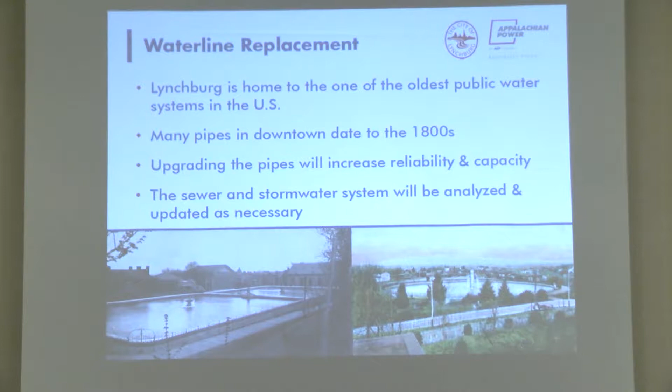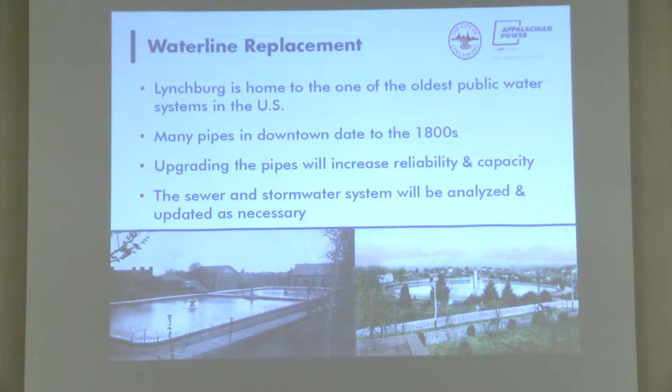You may recall it all started with the water system. Earlier this decade, we were having a lot of breaks and problems with the water system. Before this program began, the average age of a water line in downtown Lynchburg was well over 100 years, and we quickly realized it was reaching the end of its useful life. We embarked on a program to replace 49 linear blocks of water main in downtown Lynchburg. It all needs to be replaced—it's all old, and it is all reaching the end of its useful life.

3 years ago, we started on the first phase of this project, an 8-block area on Church Street and Main Street, and 7th and 8th. We took about 17 to 18 months to perform that work, and from our perspective—and I hope from yours—it was a very successful project.

We finished on time and well under budget. I was thrilled to be able to return $1 million to the city that we didn't spend but thought we might need. Overall, I am very pleased with how it ended up, and I think the city, and we hope you the community, is pleased with how that worked.

As we reached the end of that, Bonnie mentioned we had planned to go to Commerce Street next, making 5 blocks in that area our next project. But we were a little ways into designing that when Appalachian Power approached us and let us know that they too needed to replace critical infrastructure downtown, and unfortunately the area where they needed to do that was not the area where we were planning our next project.

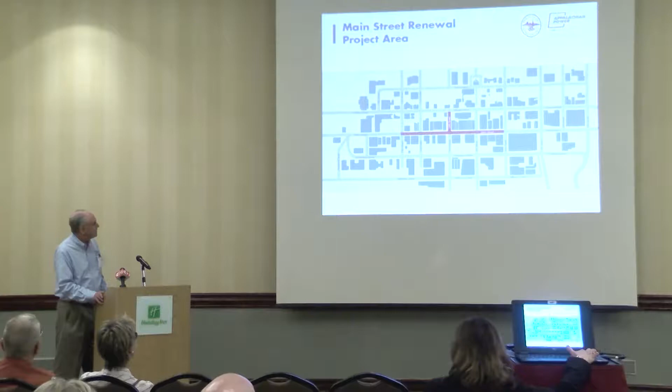This is the area shown in red in the center of the map: 4 blocks on Main Street, and 1 block on 10th Street between Main and Church. The 4 blocks on Main are between 8th and 12th. That is where this phase of the project will be. Eventually we will get to all those other phases, and eventually we will go back to Commerce Street like we had planned to do next.

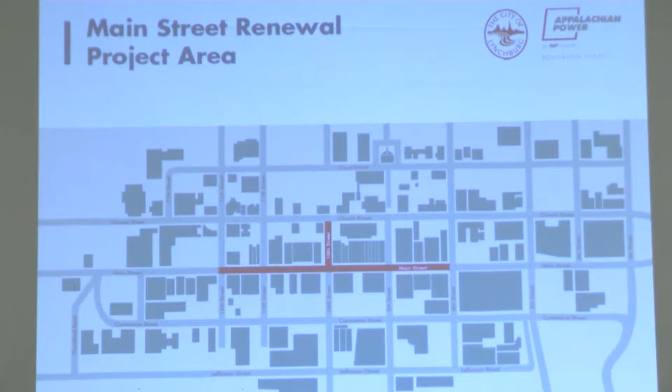But for now, we're working with AEP on this. We have been working very closely with them. Ever since they first told us this needed to be done, we started scheduling regular meetings, with conference calls and consistent meetings.

We had a lot to learn about each other's cultures, priorities, and how we tend to do work. There were some learning experiences there, but it was very valuable. Now I hope they would agree that we have a really good, really strong relationship. We hope to make this appear to be one project to y'all.

In reality, contractually, it's actually 2 totally separate projects. We have our own engineers, they have their engineers. We have our contractors, they have their contractors. We have our managers, they have their managers, they have their budget, we have our budget. But we really want to make it all work together as one project, and I think we're on a really good path to make that happen. The level of cooperation is really strong.

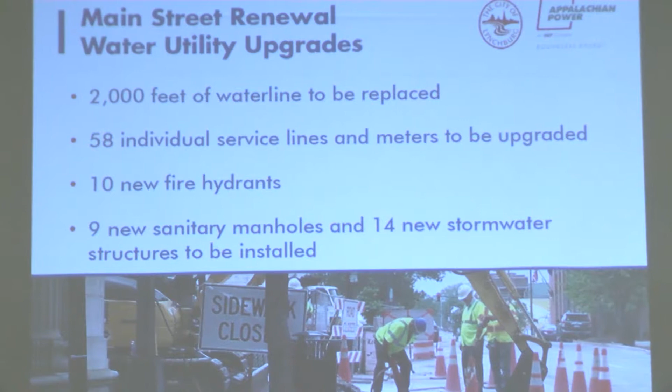So what are we actually going to do? Speaking from the city's perspective, we are going to replace virtually everything you see between the building faces on Main Street between 8th and 12th. All the curb, all the sidewalk, all the streets, all the gutters, 2,000 feet of pipeline, and the individual services to every business and resident in that area will be changing. Just everything in that area is going to change.

Once we get above ground, we typically, when we do a project, like I said it started with the water system, but we never like to do just one thing. Bonnie spoke to that too, that we don't want to go in and just do the water system and then 5 or more years later have to do something else. We want to do it all at once. This has been the policy of the city for many years. We did that with our CSO program, that when we replaced sewer lines in a neighborhood, we did the water lines, the streets, and the sidewalks, so that we only have to do it once.

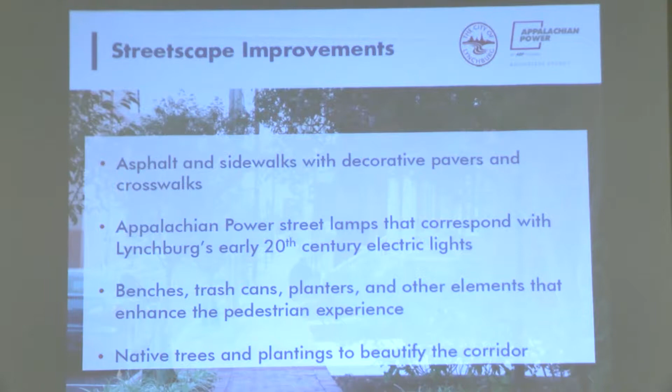This time we have the added advantage of also doing the electrical system, which is not ours and usually not under our control. But everything you see will be replaced: streets, sidewalks, curbs, gutters, light poles, benches, trash cans, planters, trees. Everything will change, and hopefully for the better. There will be some tough times going through it, but I think that's all I have to say. Oh no, I do have more to say.

The most important thing—a lot of what I just talked about was possibly old news if you had been following us—but here we have some really specific information we are basically announcing tonight: when we are going to start. That is September 16th of this year, so a little over 4 months from now, we'll be getting started.

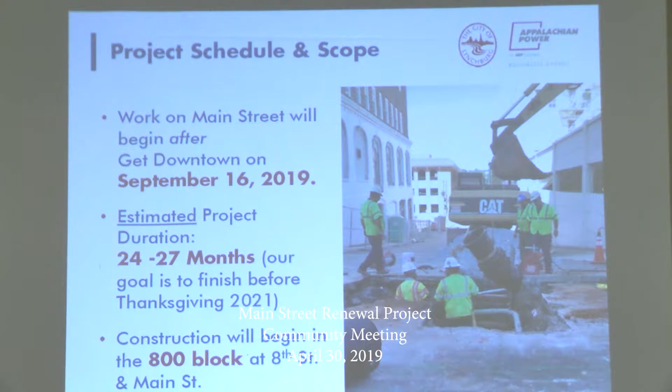We're estimating that it's going to take us between 24 and 27 months to do this project, with a goal of finishing by Thanksgiving of 2021. We will be starting at the 8th Street end of the project and working towards 12th Street, but we will very quickly be encompassing all blocks.

I want to talk a little bit about how we're going to manage things within a block. We won't go into detail tonight, but I do want to mention that in each block there are 3 corridors: a street for driving, and 2 sidewalks. So of those 3 corridors, we've set a goal to never close more than one at a time. That's something we did not do on phase 1 — we frequently had more disruption than that, but that's part of our goal now.

We don't know the exact sequence of anything, or how we're going to jump around, but we will have more of that information available at our later meeting in August.

And this time I think I'm done, right? So is Tom Woodford here? Tom Woodford with Appalachian Power will talk about his role.

Well, I'm Tom Woodford with Appalachian Power Company, and what I plan to do tonight is a brief overview of the project from Appalachian Power's perspective, of what we plan to do and when we're doing it.

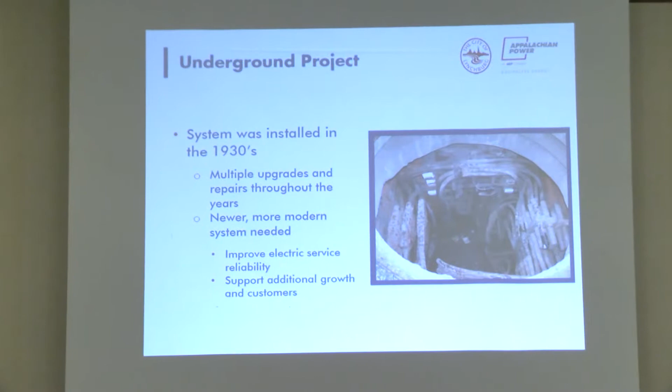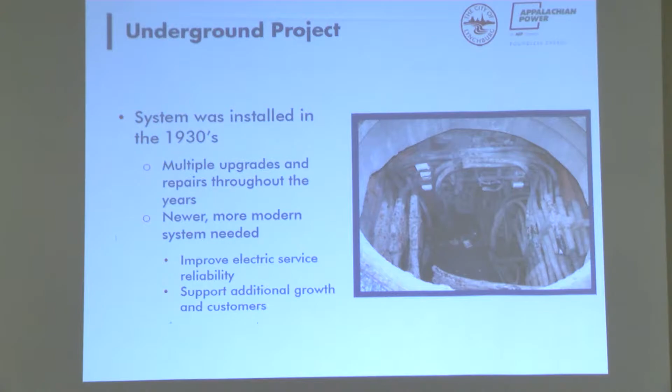During that time, we've had multiple upgrades and multiple repairs. One thing is for certain: if we weren't spending the money to make these improvements, we'd be assured of having many more repairs, to the point that the system just wouldn't carry the load we're getting.

For all the wonderful things the city's doing in the downtown district, Bluff Walk has been tremendous. The growth we're seeing on 9th Street, 5th Street, you name it, it's a constant change here in the city. Everybody wants to move down here, and that's a good thing. The Academy, when it opened earlier this year, was a great thing too.

So everybody wants to move down, everybody wants to come out to dinner down here. For our electrical system, that means a growing demand, and it's more difficult on the facilities we have. So we had to upgrade to a new, much more modern system that can handle the growth we have today, and more importantly, the growth going into the future.

What we hope to do, one, is improve our electric service reliability. That means when things fail, they don't fail for as long, and we can get them back on quicker. It also means that when you improve reliability, they don't fail nearly as often. Secondly, we want to make sure we keep up with the growth, and keep up with it with what we can provide.

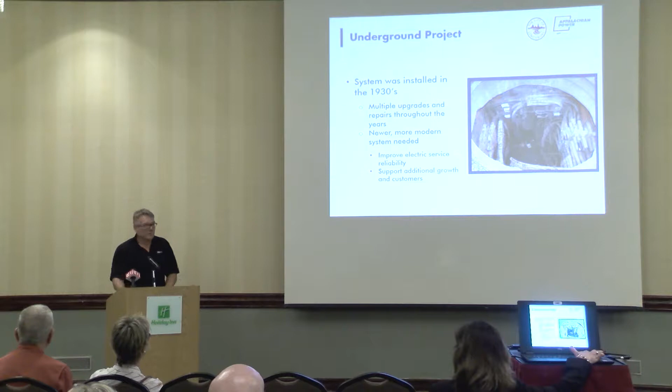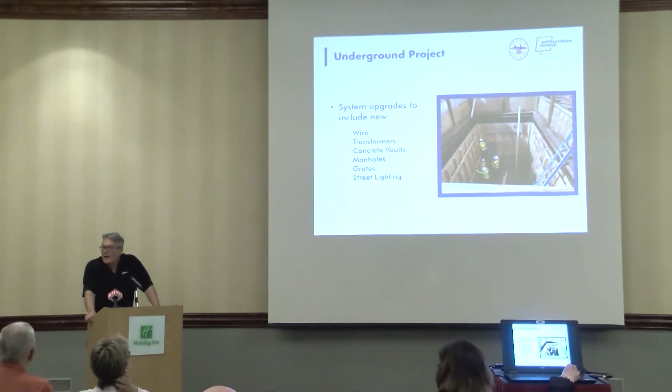Our system upgrades are going to include replacing the wire, or as we call it, conductor most of the time. We're replacing the conductor with larger sized wire. The wire we have now wouldn't do us much good to just put in new wire of the same size, so we're putting in larger, higher capacity wire that can carry the additional electrical growth in this area.

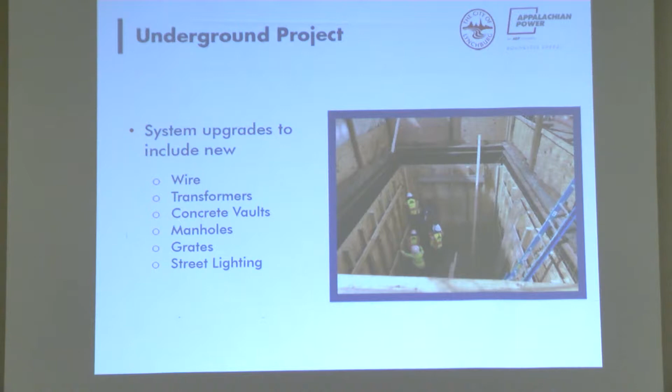We're also going to be installing new transformers, and the transformers we install will be larger with higher capacity, again looking more towards the growth.

We're putting in new concrete vaults. If any of you have been down watching our crews work on Upper 9th Street, they've been installing a large electrical vault. The contractors are in there now working on that vault. I think at this point they're forming up the walls.

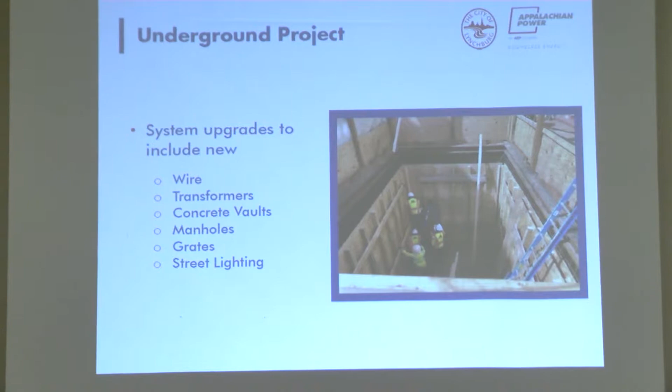We'll install new manholes, new grates, and new street lighting when the project's complete. We'll also be installing switches so that when we improve reliability and do have an outage, we'll have switches installed both in the transformers and at other locations, so when something occurs we're not losing the whole downtown district. With that, we can isolate what might normally have been a large outage into one that's small, so not as many people lose power.

The project was announced in the summer of 2018, and the side street work began about a month and a half ago, around March 6th. Since then we've already replaced, for the most part, finished with the exception of, I think, some brickwork at 9th Street. That went quite quickly, quicker than most people thought it would go.

We've moved on to replacing a vault cover down at the Market Building. I think it took us about 4 or 5 days to do that. And now we're at 11th Street, moving over to 10th Street.

By doing the side street work that we began in March first, before we get to Main, it enables us to reduce disruptions to the downtown area, specifically Main Street, while we're doing the work. We can work there, kind of off to the side, before we get into the main part of putting the conductor in on Main.

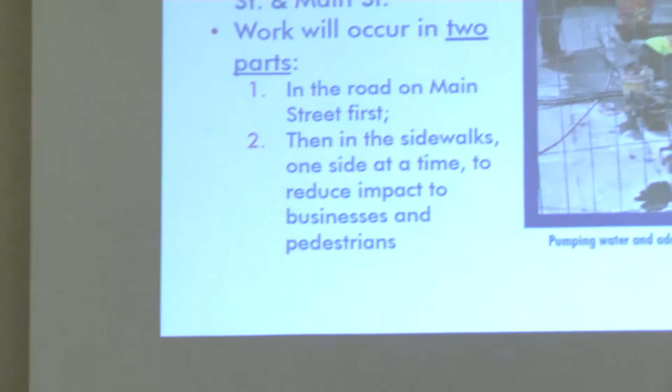We're going to begin construction in the 800th block at 8th and Main Street, and we will work in two parts. We're going to work in the road on Main Street first, going from one end to the other, installing our duct banks, vaults, and manholes. Then after we get that done, we'll start the sidewalk work, working one side at a time.

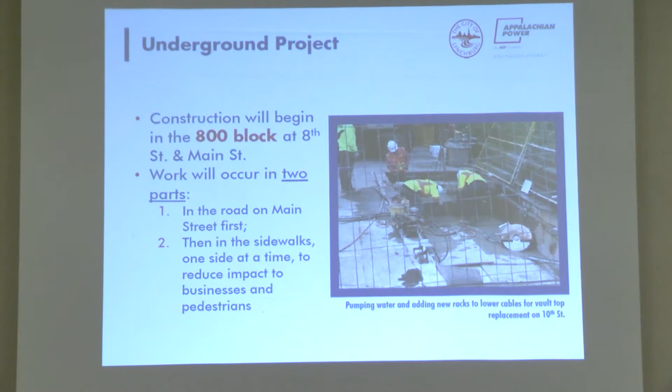I'm not sure if we have a slide for this, but I want to mention access for sure. As Jim and Bonnie also told you, we're looking at 24 to 27 months for the project to be completed. I'm sure there are going to be areas where we get ahead of schedule.

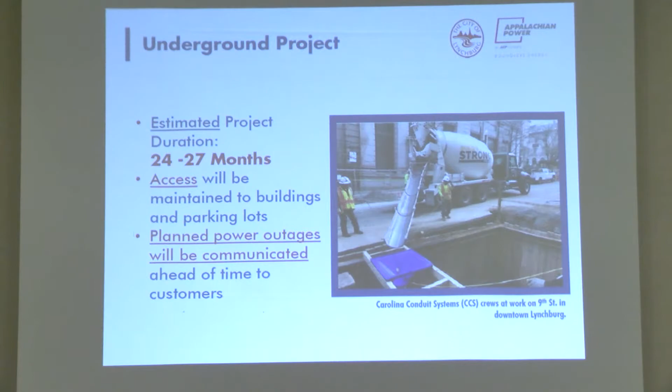With Ray, our site manager here - Ray's very good - when he sees areas where we can pick up time, we will. But on any project like this, I want to stress, sticking with an overview, there are unknowns. At times there will be unknowns that, just when you're digging under a street, you don't know what's under there sometimes till you get under there. So at times there will be unknowns we're going to have to deal with. But I'm very confident in the team we have, that we'll move on, make good time, and stick to the times we've projected.

We will provide access to our commercial customers, and we're very sensitive to your businesses. I want to be very clear about that. We're very sensitive to your business, and we do not want to disrupt any more than absolutely necessary. So you will have access to your business. We'll make sure of that.

If you have questions, specifically in areas where we're working, don't hesitate to come ask us. To the extent possible, we'll do what we can to accommodate you - and that's in the area where we're working. We can't leave an area we're working and go deal with something two blocks away. But in the area where we're working, to the extent we can, we're willing to listen to what you have to say and do what we possibly can.

There will be some planned power outages during the time we're working over the next couple of years. But if we do, they will be planned in advance, and we'll notify you and work with you before we take those outages. So the big thing in a project like this - Jess is going to talk about it, Jim's already addressed it, and so has Bonnie - is communication. We'll be here to communicate, and you can talk to any of us in the local office. We'll keep you abreast the best we possibly can.

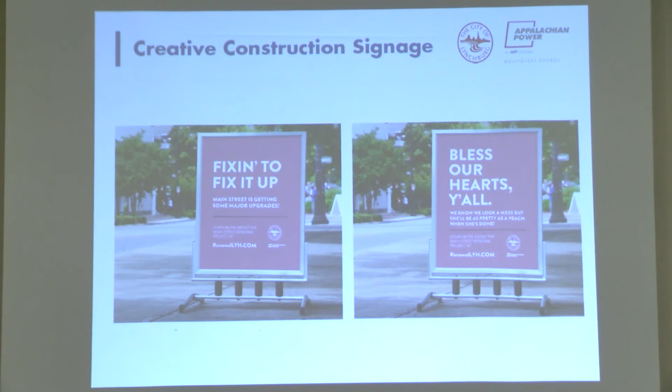Now, one of the other positive elements we're really focusing on is creative construction elements. Some of this is inspired by other downtowns, like downtown Roanoke, because they've been going through a lot of construction. There are signs located throughout downtown encouraging you to find the signs, take pictures, and laugh at them. That's really our intent, to make this a joyful experience for you.

These signs are going to focus on local southernisms, like fixin' to fix it up, bless our hearts, y'all, gonna be pretty as a peach. You'll look for these signs, we'll have tons of them going up. It's going to be a campaign where people walk by, they smile, they laugh, and then they go into your store, your restaurant, your business.

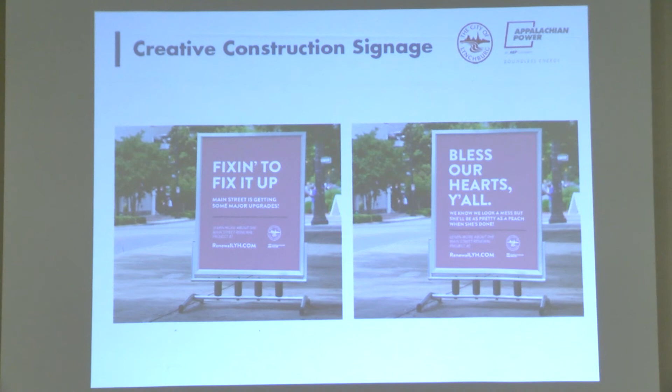Another program will be announced very soon, but we wanted to give you a taste of it. We'll be working with our partners at the James River Council for the Arts and Humanities. Appalachian Power has given us a grant to help with this project as well. We'll be doing creative construction fencing featuring local artists. We're asking artists to envision the future of downtown Lynchburg and how to get artists involved in this project. We want construction to not be just what you think — messy, noisy, in your face. How do we really change the conversation around that and make it a destination? So this is one of the elements we'll do for that.

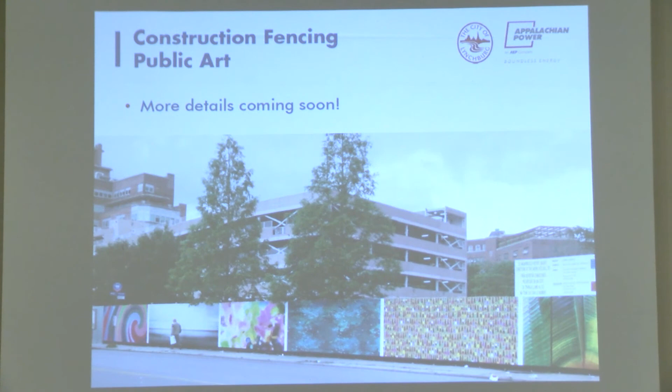So looking to the future, what is this partnership? What is the future of Lynchburg? How are we designing this? We were really inspired by the words of our 2040 master plan, looking toward creating an exciting atmosphere that makes downtown Lynchburg the heart of the region. The heart of this project between Appalachian Power and the city is really to envision the future, to increase capacity, to increase reliability, and to make this a beautiful, wonderful, safer, welcoming environment for everybody who makes Lynchburg the place where they work, live, and play.

So we realize you have a lot of questions. We welcome those questions, your feedback, your concerns. Please join us in the back of the room. We have lots of different posters set up showing some of the utility infrastructure, some of the streetscape features, and the basic area. There will be folks who can answer business questions, who can answer from Appalachian Power, and who can answer from the city. So please join us in the back, and thank you so much for joining us tonight.